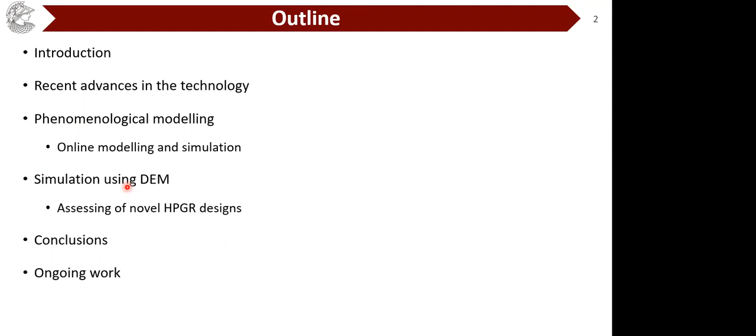Just briefly today, in the next 40 minutes or so, I'll talk about some of the recent advances in HPGR technology that have been keeping us excited. Then I'll move on to phenomenological modeling, an approach we have been really pursuing in the last 2 years. Then we'll talk about how we understand DEM as a fantastic tool to get depth on the HPGR, and move on to conclusions.

I think the group here is quite expert on comminution, but in case there's any newcomer, the HPGR has arguably been the most important advance in the field of comminution in the last 40 years or so. It was the result of the development by Professor Klaus Schonert in Germany. The beauty of the system is that he understood you can get fairly good efficiency if you press particles in beds under fairly high pressures. This was conceptualized in a machine with two counter-rotating rolls driven separately by motors, one of which is able to float over the frame.

The floating is the result of the pressurizing system made up of pistons connected to the hydropneumatic system with the nitrogen accumulator. The beauty of the system is that you pressurize the bed, but it's able to move, closing and opening, in response to changes in material compliance and the setup you prefer in your system as far as pressures and so on.

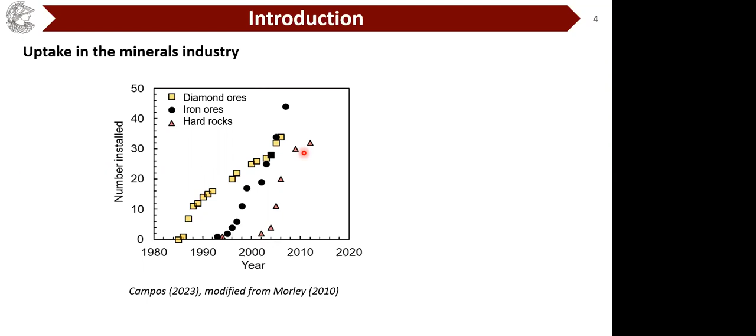Since then, this has increased, and I think people even lost count of the number of suppliers these days. There's no question that everyone involved in a new project for a hard rock application, iron ore, will definitely consider HPGR in a trade-off study for any greenfield project. So what made HPGR such a successful technology these days?

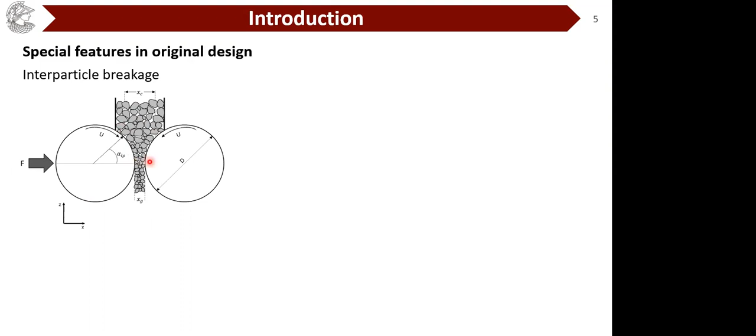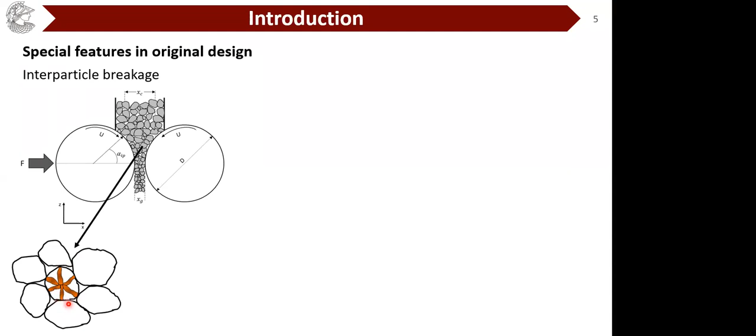I think there are some special features particular to this technology. One, as I mentioned before, is that interparticle breakage is what happens there. Only a relatively small fraction of the particles fed to the machine actually get in contact with the rollers. This is quite interesting because most particles are broken by other particles. Even though this is not as efficient as breaking particles one by one, it's definitely a much more viable option in terms of protecting the machine and its internal parts.

The other important aspect is the hydropneumatic system that allows the movable roller to move back and forth and control the pressure applied to the bed. It even responds like a spring that you can make stiffer or more compliant by selecting proper nitrogen pressures and oil pressure in the system. But of course, this introduces another level of complexity compared to a simple roll crusher.

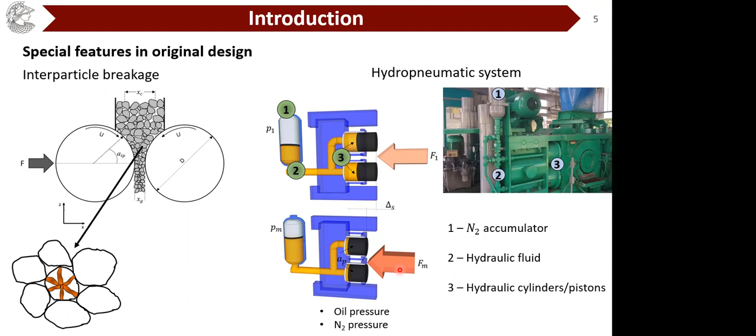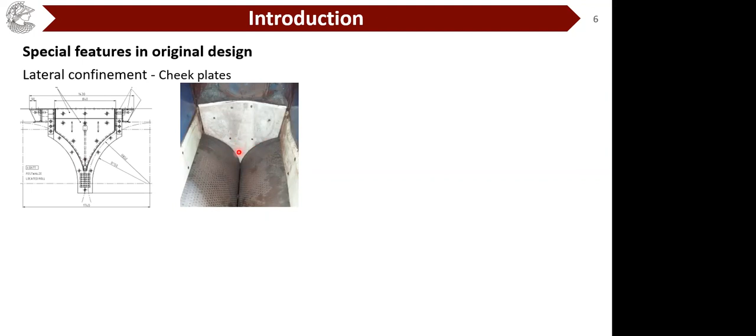Another aspect of the original design was that, since you had those pressurized rollers, you needed to contain the material from spilling out the sides. This was done with so-called cheek plates, which are consumable and eventually need to be replaced. They were introduced to prevent the sharp drop in pressure close to the edges. But even with those cheek plates, we realized that close to the edges of the rolls, there's very little size reduction. So relatively often, people recycle edge products back to the feed and separate them from the center product, which is definitely much finer.

Some pilot scale work we've done demonstrates this. Looking at the Blaine specific area for an iron ore pellet feed, the feed Blaine size is about 550 or so. Comparing that to what actually comes out of the machine, close to the center there's quite a lot of size reduction, but close to the edge, almost very little or almost none, depending on the conditions used.

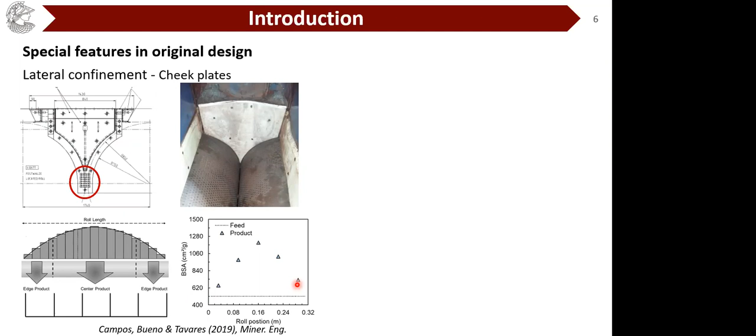So that's something that was within the technology and has its features. But as I mentioned, the Cyprus Sierrita experience raised that red flag, meaning that wear would have to be taken care of if the HPGR was going to be successful in the minerals industry.

The result was this very nice development, the proposed studded rolls, through which the tungsten carbide studs allow the material in between them to build up as an autogenous layer. This really prevents the roll itself from being worn too quickly, extending the life of the rolls quite fantastically these days. There are other options like the Hexadur, but not nearly as much used as the studded rolls.

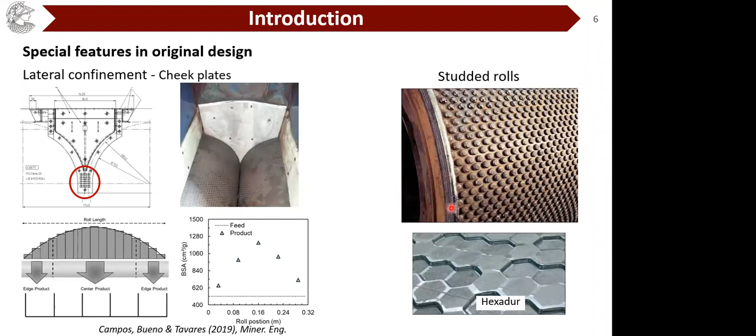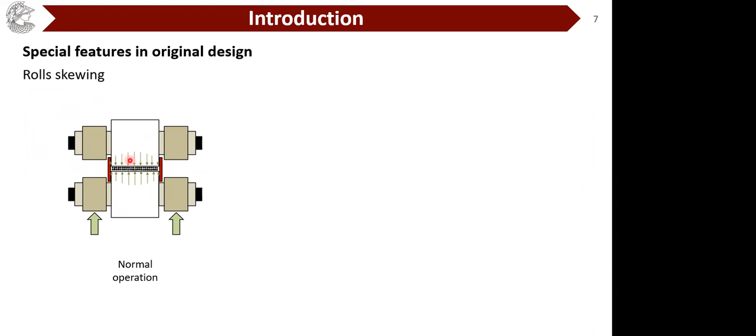Yet another feature of the technology, already built into the first design, was the allowance for the rolls to skew. So not only are the rolls able to move back and forth depending on the pressure you apply and the compliance of the bed, but they were also allowed to potentially move sideways.

If you don't have skewing and you have problems with feeding your machine—for instance, feeding coarse material to one side and fine to the other, or feeding much more material to one side and starving the other—if you didn't have skewing, you'd potentially have higher pressure on one side and lower on the other. In the long run, this would very likely result in uneven wear of the rollers, with much higher wear on one side and lower wear on the other.

Of course, the idea is that with segregation, you always have to take care of the problem at the root. But if you don't do that, and if your rollers don't skew, eventually you'll have uneven wear. The beauty of the technology is that skewing was considered from the start. So if there's an effect like this, the rolls are able to compensate for this uneven pressure by moving sideways, in such a way that the pressure will be slightly rectified.

So potentially it gives enough time to sort out feed problems without having to deal with severe uneven wear. These are all features that I guess were responsible, at least in good part, for the success of the machine in the early days of the technology, since the 1990s and so on.

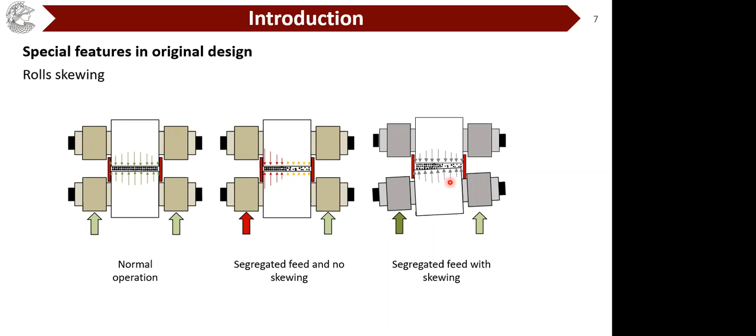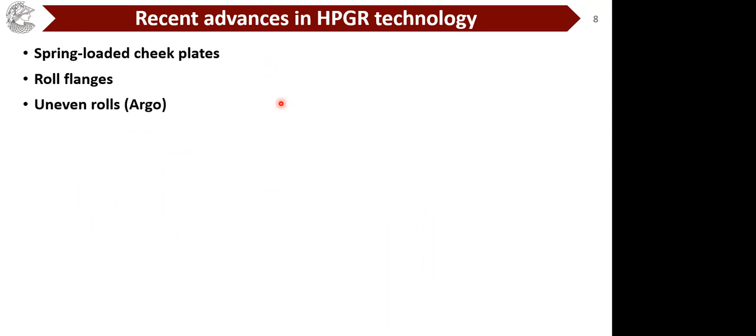Some interesting advances have been made since. I just want to mention three of them: the spring-loaded cheek plates, the roll flanges, and uneven rolls, which have been proposed in recent years as a new kit for HPGRs.

The spring-loaded cheek plates have been proposed by KHD, today known as Weir. The idea here is essentially to treat the cheek plates as things that can be managed—not only do they wear as time goes by, but they also close as needed to compensate for this wear, and to comply better with situations under more extreme skewing conditions, such as the one illustrated here.

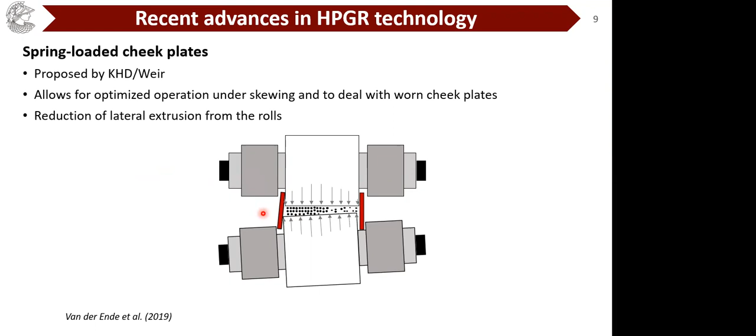By being able to manage the cheek plates, you can potentially reduce lateral extrusion, because if you have very moist and fine feeds—such as the ones we deal with in iron ore pellet feed, as high as 8% moisture—if you don't have closed cheek plates, a significant proportion of material can bypass from the side of the rolls without being reduced at all. This is an interesting recent development that can really improve the performance of HPGRs.

Another development, proposed by Metso quite a few years ago now, are the roll flanges. Essentially, one roll has flanges on both edges, so it works like a moving cheek plate system, allowing these lateral areas to be more confined than you get with a traditional cheek plate.

The idea in this system is to potentially reduce the edge effect, and also by reducing the friction between the cheek plate and the bed, you'll be able to move more material through the rolls, which is essentially increased throughput. These are the claims, and some of the results already show that.

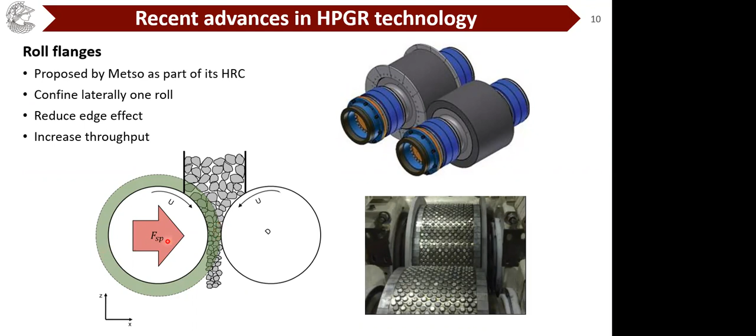Just one last advance I'd like to mention is a fairly different design of HPGR that has been proposed, called the Argo mill. This is shown here from one company in Germany, Argo IPS. Essentially, the two rolls are at an angle, 30 degrees here. The difference is also that they propose to only motorize one of the rolls; the other one responds to the motion of the bed and the other roll.

As you can see here, this machine could potentially work without being choked, so really just with a small bed of material here. Besides, another claim is that it would potentially allow working with much higher velocities.

Looking at the y-axis, throughput, and the x-axis, velocity: we know from experience that as we increase velocity beyond a certain level, you start to get slip in most HPGR designs. It's actually claimed that Argo can prevent this from happening using this system.

So these are some of the things that have been out there. Some of them have already been adopted by industry, some others not. But it really shows that the scene in HPGR technology has been quite alive, and it shows that the technology will continue to have a place in the future.

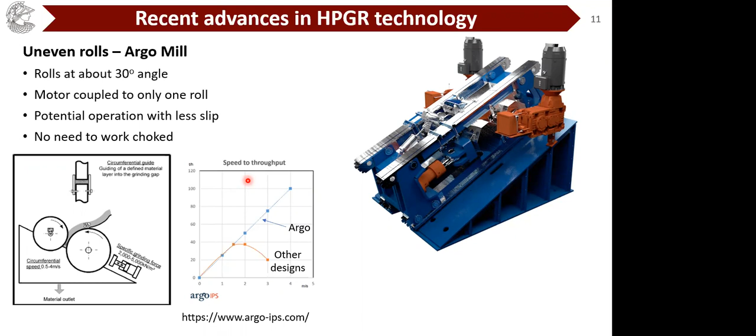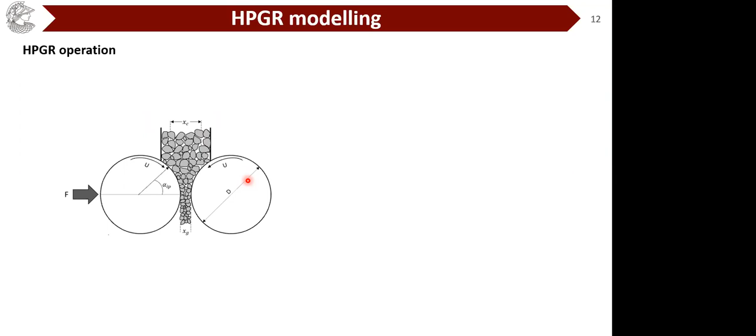But of course, as people who want to understand and improve both the operation and design of HPGRs, we'd definitely like to understand how we can put the performance of the machine inside a computer, to be able to respond to what-if scenarios. So I'd like to understand how the HPGR operates.

By looking again at the machine and breaking it into different contributions, such as material characteristics on the upper side, the machine operating conditions that we can play with during operation directly or indirectly, and of course the design characteristics of the machine, all dimensions and characteristics of the hydropneumatic system. With all these things, we'd like to be able to predict with fairly good confidence what will happen in the machine.

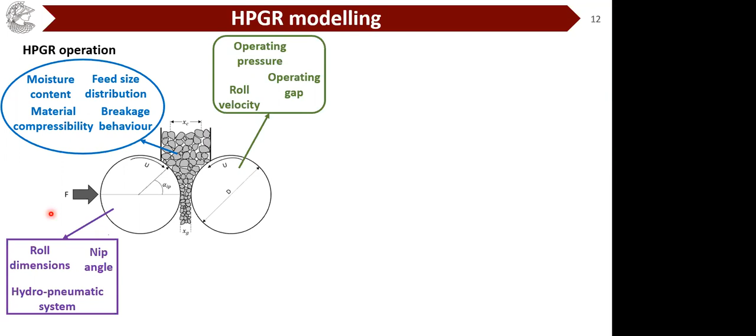So, of course, when we look at the real world, we'd like to, as I mentioned a few slides ago, look at things that do happen in real life, such as the rolls wearing during operation. So we want to be able to predict not only what happens when the rolls are entirely new, but also as they are progressively worn.

We want to be able to understand the confinement system, the different confinement systems, and how they will respond in a particular operation. We'd also like to describe the effect of skewing in the event it may appear. So there are definitely different levels of complexity we'd like to tackle in our modeling approach. So how can we do that?

Definitely, there's plenty of complexity in what I just mentioned. So the approach we use is essentially to understand how particles break, and we can do this very nicely starting from individual particles, as you can see here, using a microcompression testing system that allows us to characterize the distribution of strengths of very fine particles, 100 microns, 50 microns or so.

But we can also go to piston-die systems to get insights on how the material will respond, to be able to take that information into the HPGR. In the end, we want to be able to use whatever tools are out there to predict what happens in the HPGR.

So we looked at phenomenological models, population balance type models, to provide results such as throughput, particle size distribution of the product, and power. But we also recognize there are obvious limitations to population balance systems, because they really lack quite a bit of understanding of the physics behind the machine.

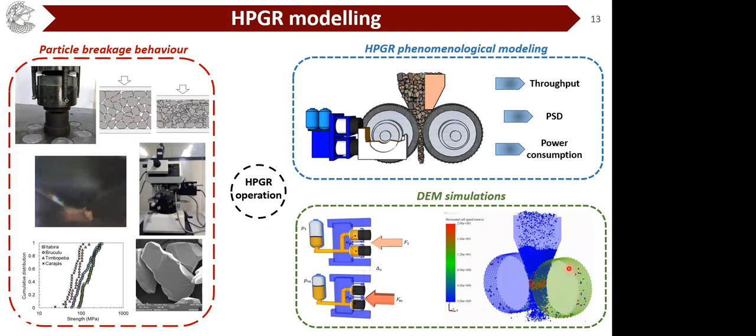So we look at DEM as a potential tool to incorporate quite a few complex things, such as details of the hydraulic system, skewing effects, roll wear effects, and so on. So in order to do that, we coupled with Vale here in Brazil, who was really keen on improving their HPGRs.

You can see here that HPGRs sit right in the middle of the whole process for preparing and producing iron ore pellets. They're downstream from traditional ball milling and classification steps, and upstream from the pelletizing operation. So they're basically the last resort to add value to the material before it becomes a commercial product, which is iron ore pellets.

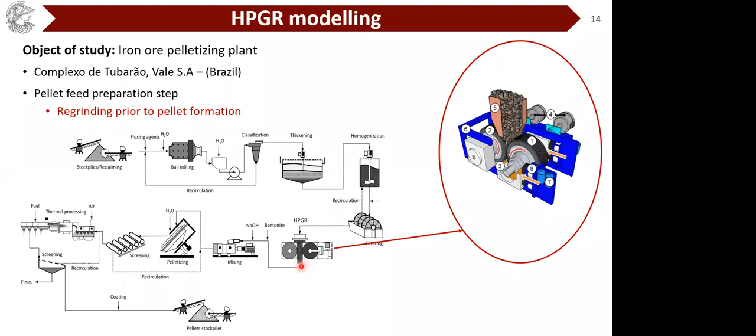The HPGRs have a role there, and they've been used quite successfully, a number of units around the world, and at Vale since the 90s. But when we started to talk to them, we realized that the level of understanding of the machine's performance was relatively limited for this application, which is definitely not the application we see these days, and not the original application that brought HPGR to industry.

Three successful approaches that essentially incorporated most of these variables you can see here: material variables, machine settings, and calculated or assumed key variables such as gap and operating pressure, giving some of these outputs. Some models did provide some of them, others not all.

What we did, because of our experiences—as Malcolm mentioned, I did my PhD in Utah, and a lot of the work from John Herbst and the energy-specific selection function was done there—we could really see the potential of this Torres and Casali model to give a good contribution to the application we're interested in, which is iron ore pellet feed.

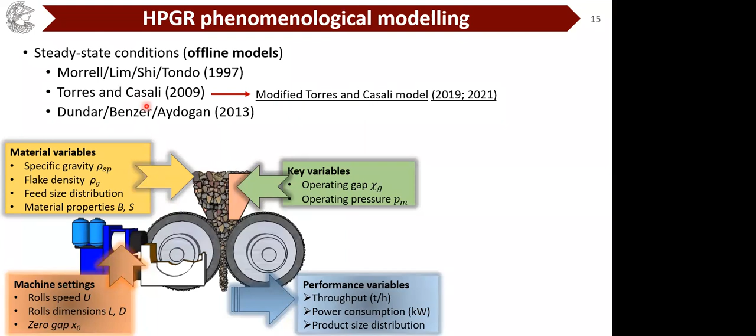So we really invested quite a bit of effort in improving our understanding of this model and how it can be applied successfully to HPGRs grinding pellet feed.

So just an overall look at the model: essentially, a population balance model is used, and a parabolic power profile is assumed. On the basis of the machine settings, the material variables, and some key variables such as gap, the model assumes plug flow to predict throughput, and a simple power equation on the basis of compressive force and nip angle to predict power. With power and throughput, we could calculate the particle size distribution.

This is the original Torres and Casali model proposed quite a few years back. It's documented in quite a few publications. On the basis of extensive data from pilot scale and industrial scale, we understood that in order to apply this model successfully, we needed to modify it. So we called it the modified Torres and Casali model, understanding that the nip angle is really a parameter that has to be fitted on the basis of good data.

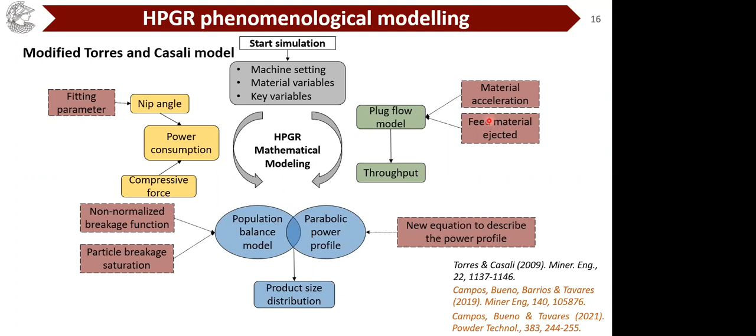We understood that the breakage of these materials was fairly unusual, so we updated the breakage function. We incorporated the effect of saturation. We also understood that depending on the design of the HPGR, the parabolic power profile doesn't appear, but rather a trapezoidal one. So all those things, including material acceleration and material ejected from the edge of the rolls, were introduced to help the model describe reality.

Essentially, when we naively applied the Torres-Casali model to data from pilot scale and industrial mills—these are industrial HPGRs—we could see quite a big difference between the experimental results and the model predictions.

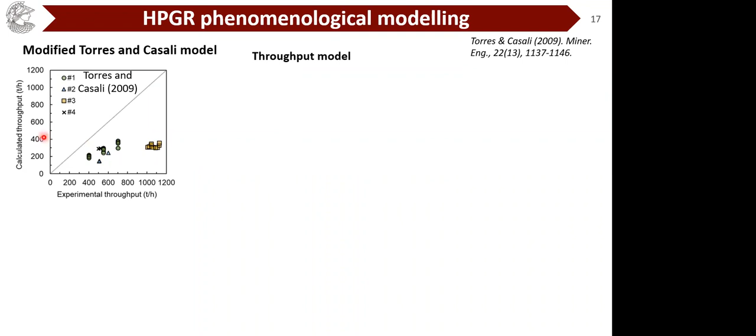What we did then was incorporate those effects I just mentioned: the effect of edge material being ejected from the edge of the rolls, as illustrated here, which we see in practice quite significantly in HPGRs with iron ore pellet feed, along with effects of acceleration and so on.

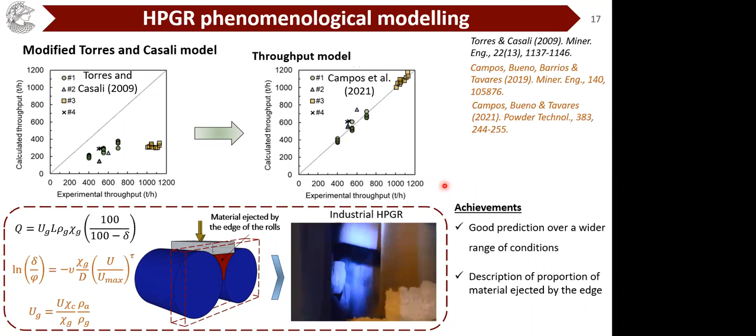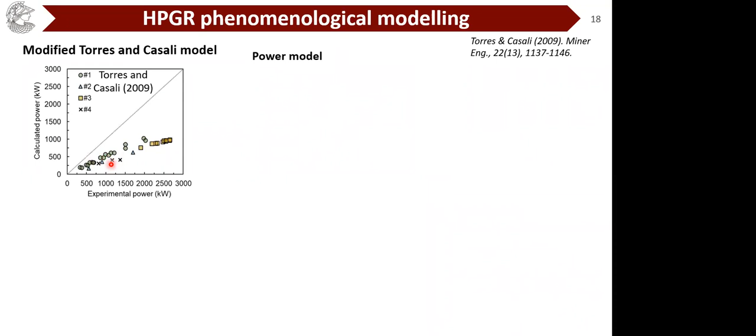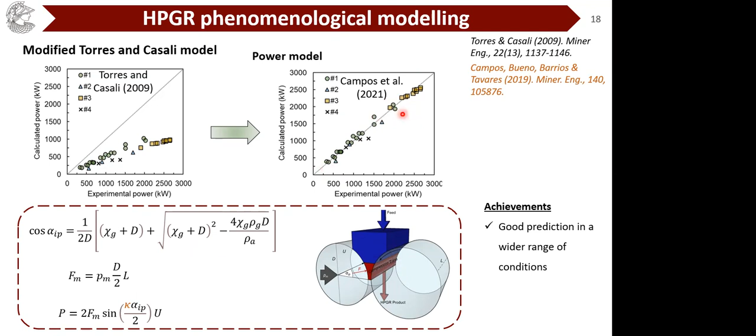So the experimental and calculated results were quite different, but nevertheless, with a bias that could be corrected, essentially by introducing a parameter that adjusts the nip angle from the calculated one. Just by doing this tweak, we could actually get very good prediction of power for a range of machines, from industrial pilot to industrial scale.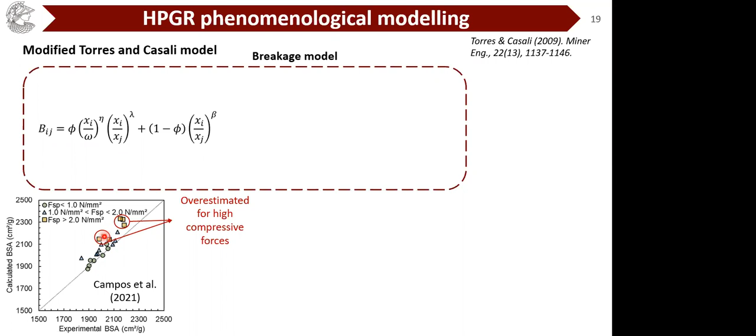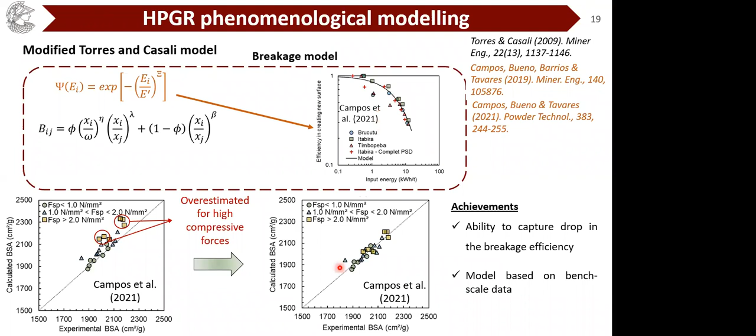But we could see that for very high pressures, we were overestimating the fineness of the product, which suggested we weren't accounting for something important. On the basis of piston and die data collected from the lab, we could see there is an inefficiency that appears as you increase the specific energy or pressure. By introducing this correction for inefficiency due to overloading energies, we got much better agreement between the predicted and measured specific surface area.

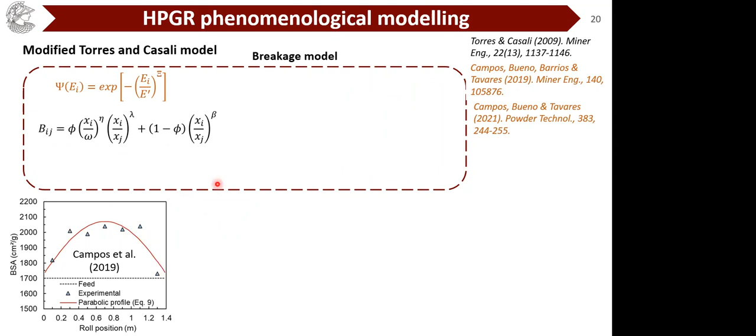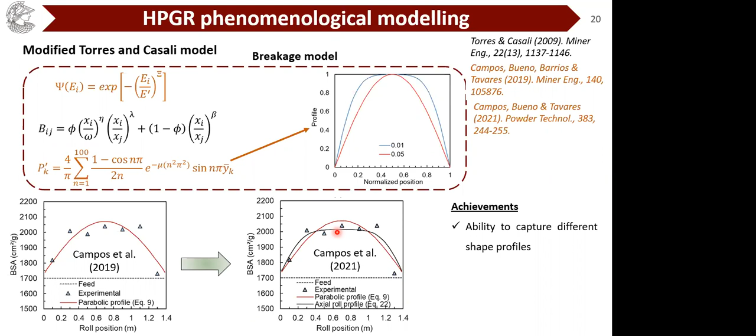In addition, the original model by Torres and Casali assumed a parabolic power profile. But when we look at industrial machines, we see very often a more trapezoidal power profile. So we incorporated a different model which allows us, with just a single parameter, to describe this power profile, which translates into a fineness in the product profile, shown here in the black line. We were able to successfully describe that both from pilot and industrial scale machines.

We've been using this model in the minerals industry quite a lot offline, to improve the process and so on. But we'd like to use this model now to make decisions online and to assist operation.

This requires another view of the model, looking at real-time information on the process. If you want to predict operation in an HPGR, that will have to somehow be understood. In the case of iron ore pellet, you have to account for the fact that you're blending materials in the feed with time, and that blend changes. So potentially we can use this type of information with the model we developed. It's essentially a quasi-dynamic model, because we're not looking at very short dynamics like within seconds, but really at dynamics within minutes and hours.

The vision we have is to use the model as a digital assistant, something that can assist the operator to understand what lies ahead in the next few hours of operation, to better fine-tune the operation instead of just responding to whatever happens, like in typical control systems today. Potentially this approach can also be used as a control strategy in the future to improve operation of the machine.

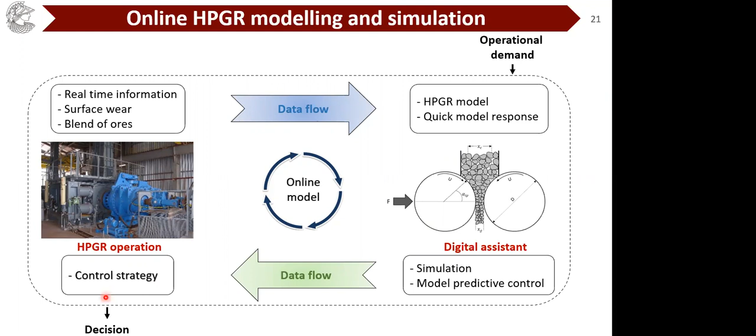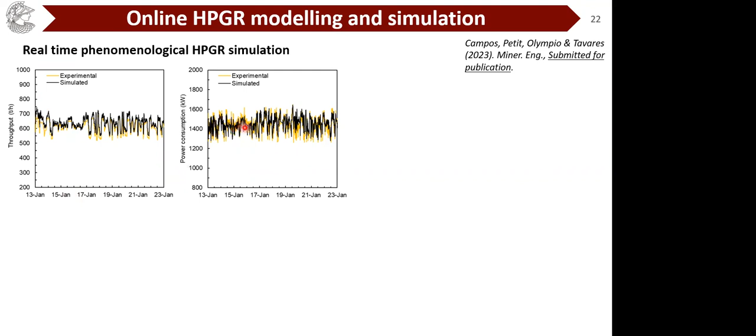So how did we go about testing this model using real plant data? Looking at very short time spans, you can see the yellow lines here, which are essentially the data from the plant, from the supervisory system. On the basis of data we have from the feed and the settings used, we could essentially predict the throughput fairly well in a very short time span, and also predict the power, leading to fairly good predictions of the specific energy.

And this, we understood, was the reason why the model was already completely failing in predicting the operating condition, the outcomes of the process. So what we did is actually put together...

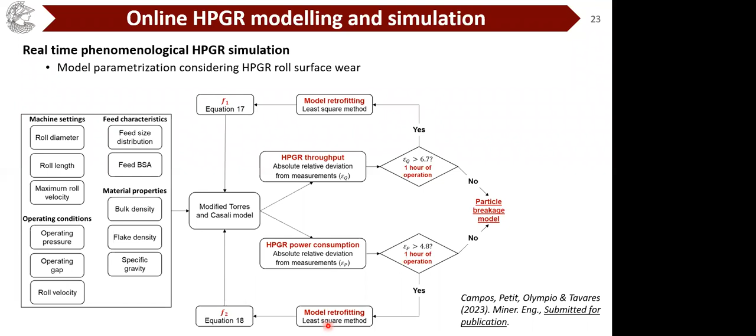This now allows us to fine-tune a couple of model parameters, very few model parameters that we call F1 and F2, to be able to account for just a tweak in the throughput and a tweak in the power, to be able to predict the results from operation. So just by doing this, we could actually reduce quite dramatically the deviations from the model to what we see in practice as far as throughput and power.

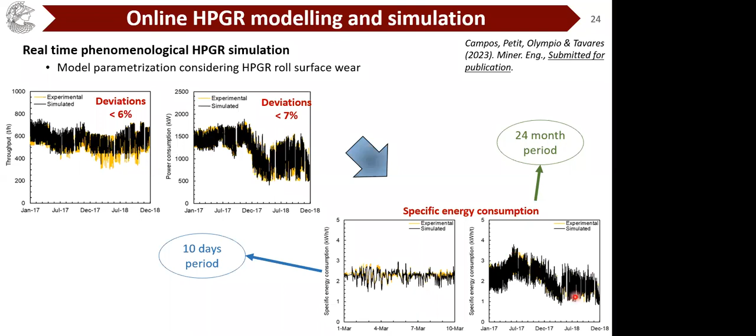And of course, the result by doing this, we could see very good prediction here in specific energy for a short term that we're already doing a good job, but especially for a very long term, maybe over a year, so over two years in operation.

So we're definitely very happy to be able to do that offline, but using data online. And just to illustrate, we want to be able to use this information to let them know what they could have done differently in the operation.

So for instance, when we look at the feed to the HPGR, the Blaine, which represents fines, varies quite a lot. And what we have seen in practice is that the product of the HPGR is almost responding to these changes in the feed. So it means that very little is done these days to tweak the HPGR to actually try to get what we would like, which is essentially a constant Blaine for the pelletizing operation.

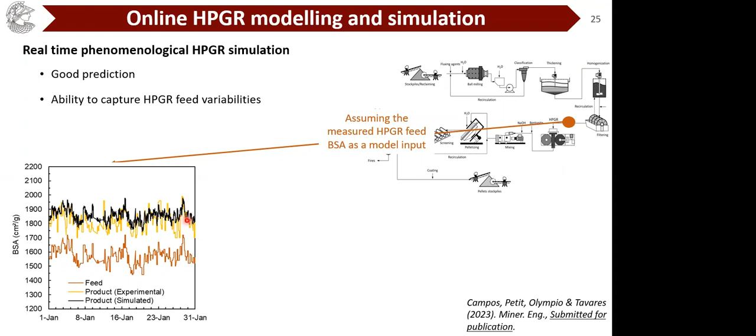So essentially, first what we did is just apply the model and say what would be the prediction of the Blaine. It's fairly good. It's not really as close, very close to the product, but gets very nice the trends. So we qualified, I believe, to be able to propose to them what they could have done differently in the operation.

So in order to demonstrate that, we'd like to show what could we do if we actually use the model to optimize these operations. So these are the same data as before.

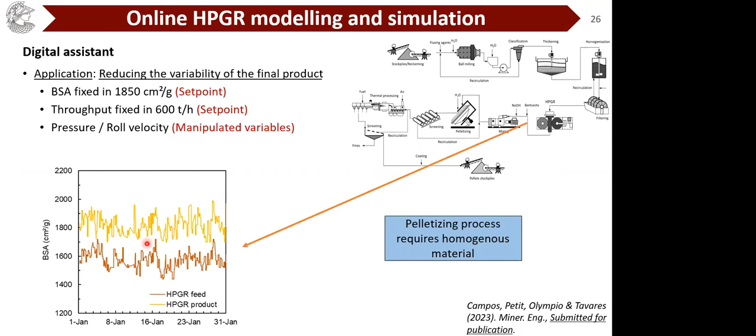So by doing this, we could essentially say that if we tweak the velocity and the pressure using the understanding from the model, we potentially could get this level of constancy in the Blaine of the product, which is far dramatically less than what we see in practice. As you can see here, deviation is 13.6 compared to 66 centimeters square per gram.

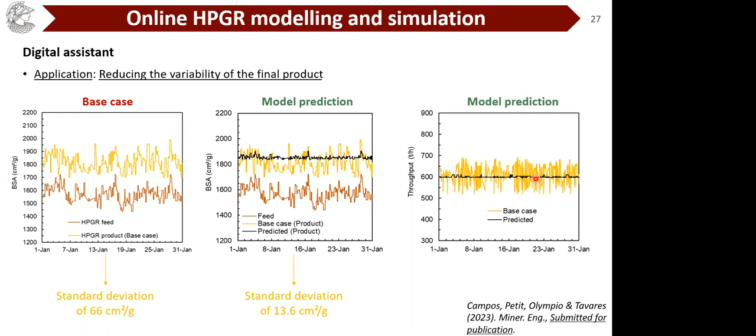And throughput, of course, we could actually drive throughput to a very constant value of 600 tons an hour, which is exactly what they need in the pelletizing operation.

But of course, this is important to see that in practice, this would require much more significant changes in things such as pressure and velocity. And what we see in practice is that the operation ends up being very conservative, keeping the pressure and the velocities almost constant, even though there's quite a few things changing, such as the feed characteristics and the ore characteristics.

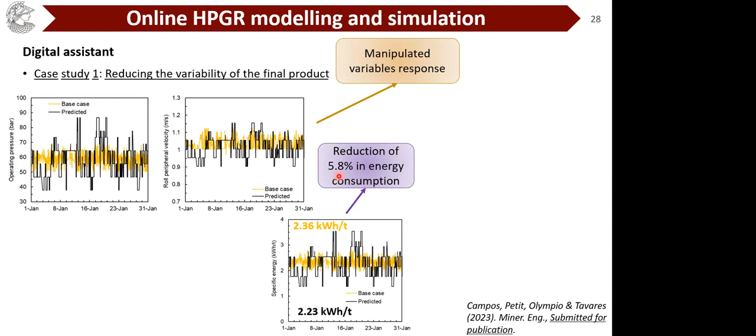So we believe that the model will be able to allow people to definitely look outside the box of operating conditions, because all of these changes here in black predicted are well within the conditions that can be dealt with in the machine. So by using this, we could demonstrate that they could reduce as much as 5.8% in specific energy and get a much more constant product if they actually have these tools online.

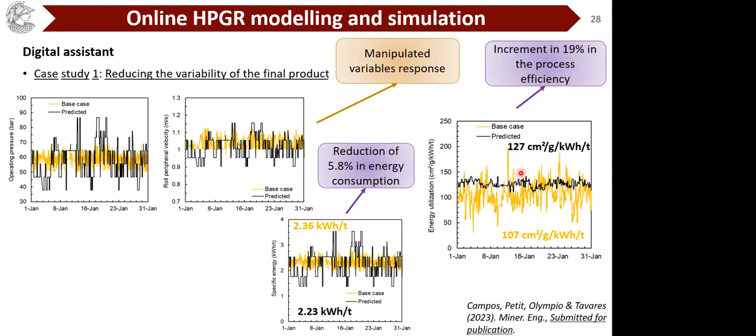And on top of that, if you look at this specific energy utilization, which is essentially specific area per kilowatt hour per ton, we could demonstrate that by operating optimally the HPGR, we could actually increase the efficiency by as much as 19%. So I think we're happy that we could demonstrate this application of the phenomenological model.

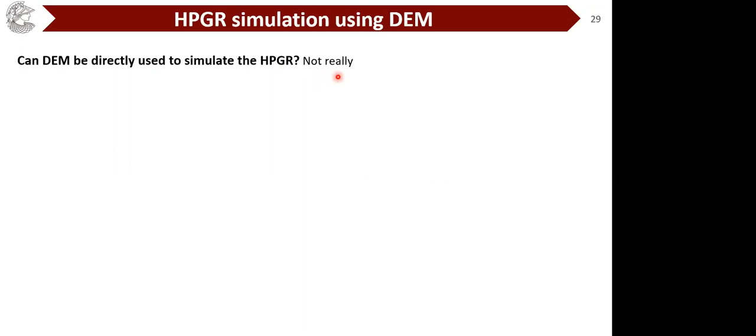So this really motivated us to look at DEM as a very powerful tool to simulate the HPGR. But I think the answer to the question, can we use DEM right away to simulate the HPGR? I think the answer is not really. DEM alone cannot really describe what happens in the HPGR. The reasons are at least three. The first is the fact that you really have to describe the multi-body dynamics.

So you have to describe the fact that one of the rolls is moving, responding to the compliance of the bed. We have actually been able, together with guys from DEM Solutions back then, Altair EDEM, to incorporate this model into EDEM since then, and it's already standard today. Very recently, we have even been able to not only put the motion in the X direction, but also the twist in the XY direction to be able to get this skewing described.

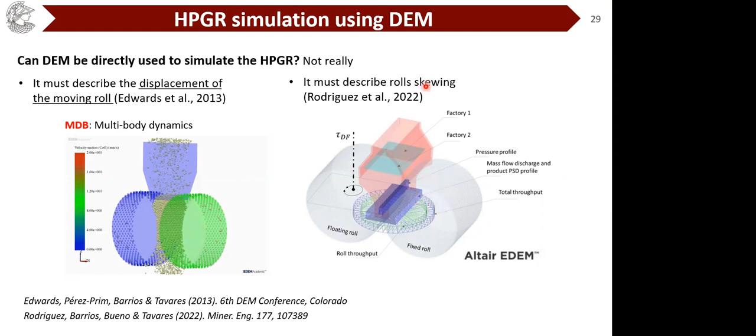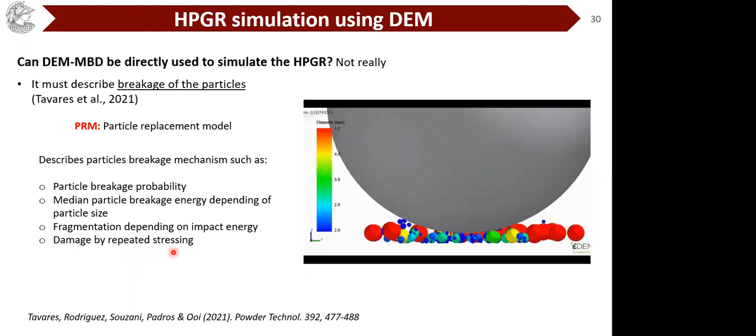The other piece of the puzzle required to describe HPGR operation in DEM is to be able to actually break the particles inside the environment. This was done using a particle replacement model that we implemented in the code a few years back. This breakage is fairly detailed because it accounts for the distribution of particle strengths or breakage probability, variation of particle strength with size, energy-dependent fragment distribution, and the damage that results from repeated stressing. Even though this model was originally developed for impact, we have been using it for compressive systems fairly successfully, with just some challenges that I'll talk about shortly.

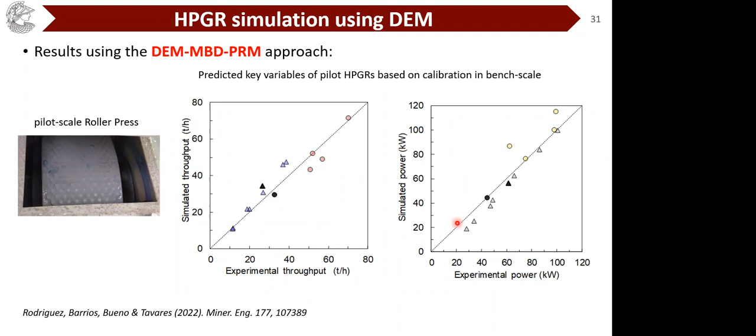So how did we go about using this model? We first did quite a bit of validation work on the basis of piston-die testing, material calibration for DEM contact parameters, and using extensive data for pilot scale machines. You can see here throughputs in the tens of tons an hour. With just a little bit of fine-tuning in the DEM, we could predict, on the basis of just one test, results from a number of different conditions - velocities, pressures - and this applies to throughput and power. We can actually get those two from the DEM simulation fairly successfully already with just one base case.

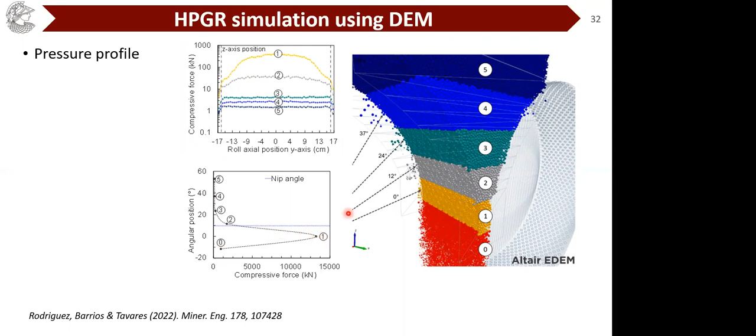Of course, the beauty of DEM is that you can really go inside the machine and understand some of the details. For instance, you can look at the pressure force distributions just right at the gap, or almost at the gap, and see that as you move upwards, the force is reduced quite dramatically, but you may also get some breakage. It allows us to exactly see the nipping when it happens in the HPGR, compared to what you see from the equations. So one of the things we can do in DEM is answer the question: what happens when the rolls are worn or partially worn?

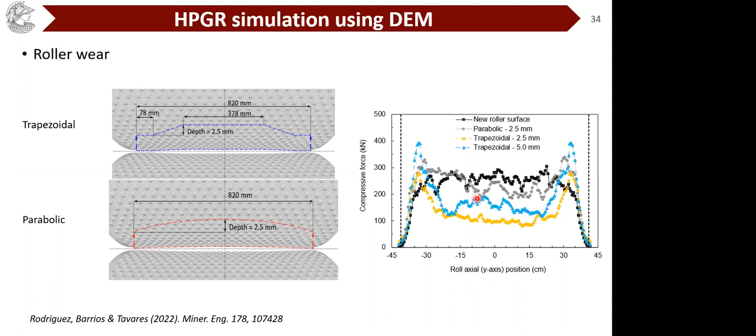Another thing we could study using simulation is the effect of segregation in the feed. For instance, if one part of the machine is fed very strongly with material and the other is underfed, or one side is fed with coarse material and the other with fines, or one side with very tough material and the other with very soft material - what happens to the degree of skewing? Skewing, as you know, is measured in millimeters per meter of the rolls. Here is the relative variation across throughput, size, and strength. You can nicely see that if there's no variation, there's almost no skew.

Here is just an amount of 0.5 millimeters skew. But as you get more and more variation, especially if you have segregated feed, coarse material on one side and fine on the other, very little segregation in respect to size leads to very significant skewing, 4 millimeters, almost 5 millimeters per meter. So it's a little more compliant here.

If you really have strength variability, it doesn't really skew as much. So these are some things that we can really look at in simulation and of course look back at operation and check if it makes sense.

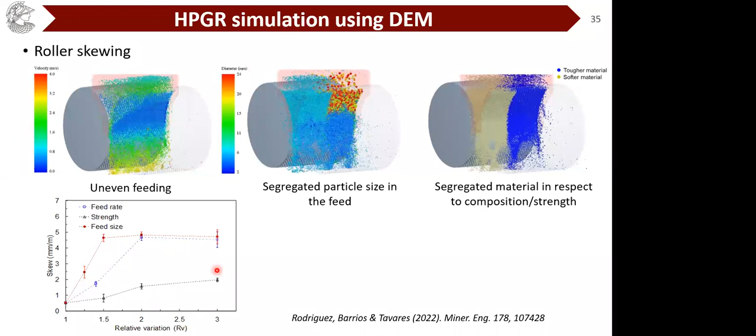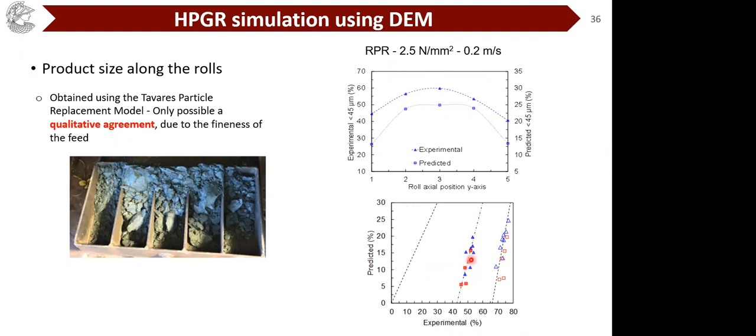So you can see here that definitely when we look at the 80% passing material, or the passing 45 microns for instance, it is quite off from what we measure experimentally, but nevertheless quite consistent with the predictions, at least qualitatively.

So just very quickly in the last few slides, since I talked a little bit about some of the advances that have been happening in HPGR technology, I think it's interesting to see what happens if you actually implement some of those changes in your existing HPGR. That's typically fairly expensive to answer if you want to do in real life, but I think this is perfect to be done in DEM, because for instance we can see what happens if you put spring-loaded cheek plates in an HPGR that just has regular cheek plates.

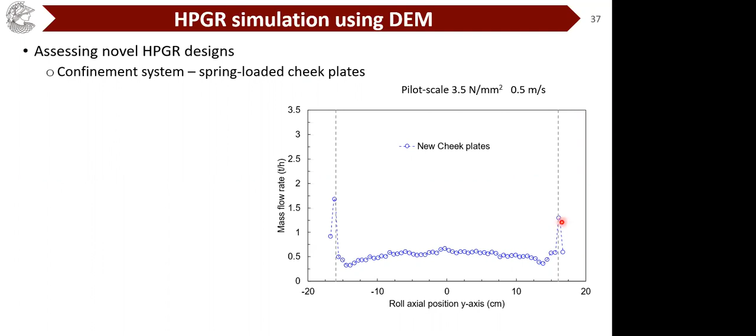So if you have regular cheek plates, what you see is something like this in an HPGR. We have material flowing, the mass flow material in the middle fairly constant, but then it really raises close to the edges when the cheek plates are new, nicely closed, for a standard operating condition here.

But then what happens is that due to wear, you start having more and more allowance of material to spill from the sides of the HPGR. So the flow from the middle even drops a little bit because some material will be spilling out from the edges, and obviously that material will be pressed very little. That's something you don't want in an HPGR, but it happens in practice because the cheek plates are being worn.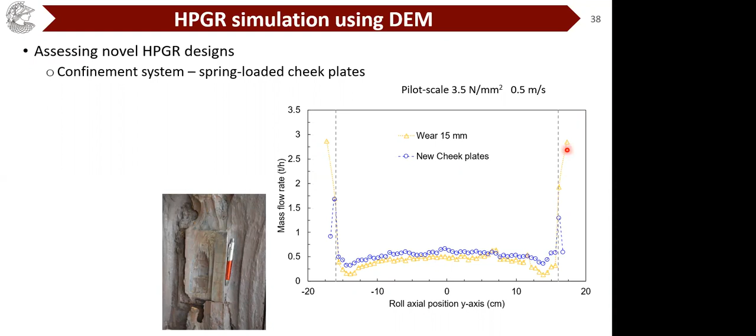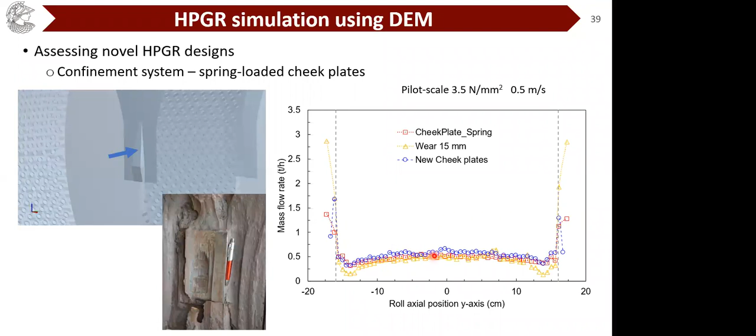What happens is that now we could simulate the effect of doing exactly what the spring-loaded cheek plates does, which is apply a force to make sure the cheek plates keep closing even though they are getting worn, as you can see here. By doing this, you can see in red that you fairly compensate the wear by actually pressing the cheek plates, so the mass flow can be really reduced.

When you look at the details, for instance what happens when the HPGR was new compared to what happens when the spring system is applied, you can actually compensate quite a lot, because we reduce the bypass that increased because of wear and basically retain essentially the throughput as before.

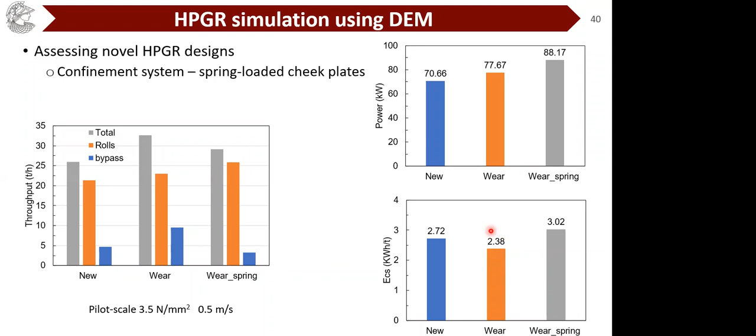With worn rolls, of course, you have much throughput, but you don't have much size reduction. You can even see here that depending on the conditions, you can even increase power if you push the spring even further, and the specific energy can be managed pretty much to the level that you want, whereas in practice it will reduce if you don't do anything and just allow the rolls to wear.

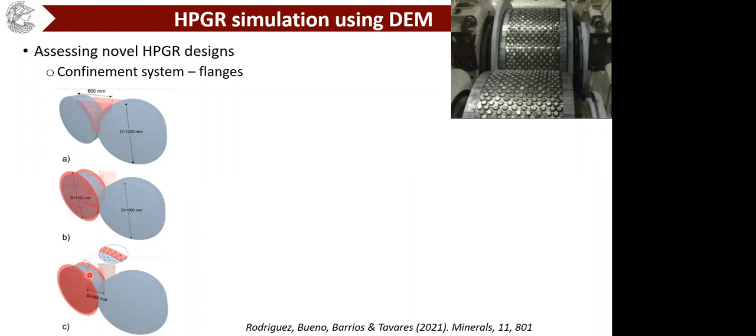Other application that is feasible to study here is the flanges. So we know that if you have an HPGR with cheek plates like this, we can actually put flanges. Those flanges can be smooth flanges or pin flanges, as you can see in the picture. We'd like to essentially see what happens if you actually put flanges to an existing machine.

So this is the original design, the throughput, the mass flow rate, as shown before, with some material spilling from the sides because of the distance from the cheek plates.

What happens is that if you put smooth flanges, the distance difference was very modest, meaning that depending on the configuration of the flanges, if there's no grip that can really be exercised by them, you may not see much benefit.

On the other hand, by putting studded flanges, you can see it definitely reduces variation in the flow rate from the edges, reducing material spilling from the sides.

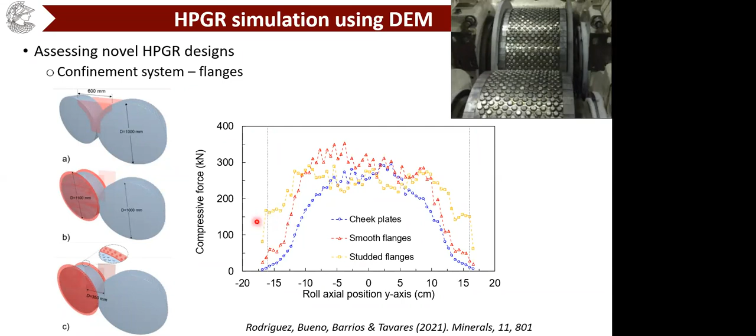It definitely seems like a good thing to have in the HPGR, which indeed it is, because the blue line, the force distribution, shows more like a parabolic profile with cheek plates, whereas the studded flanges manage to get the forces more or less averaged across the whole roll. There's still an edge effect, but it's much more reduced.

Looking at numbers from the cheek plate simulation, we get results like 30 tons an hour with a specific energy of 2 kilowatt-hours per ton. When you put studded flanges, it changes the gap quite a bit under the same operating conditions, increasing throughput and power, but on the other hand it reduced the specific energy a little.

So it's important to keep in mind that if you put flanges, you probably increase throughput, but you need to check if you have enough power to cope with that. Otherwise, you'll probably have to work with lower velocities to keep the same product size reduction.

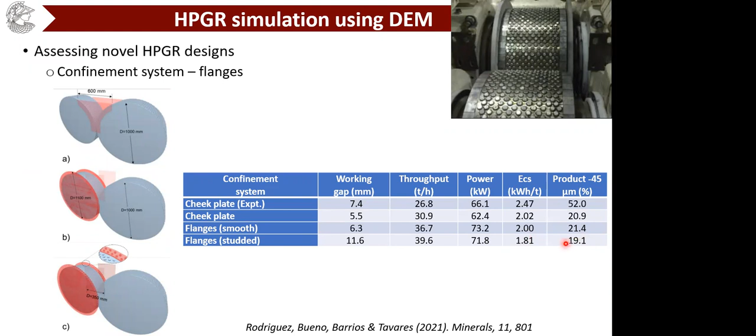From the experimental data to the simulation, there's obviously a big difference because we couldn't put enough fine particles, but nevertheless we believe these trends in the simulations are reasonable: when you put studded flanges, you don't change conditions much, but you reduce the specific energy, so the product gets slightly coarser, even though more uniform.

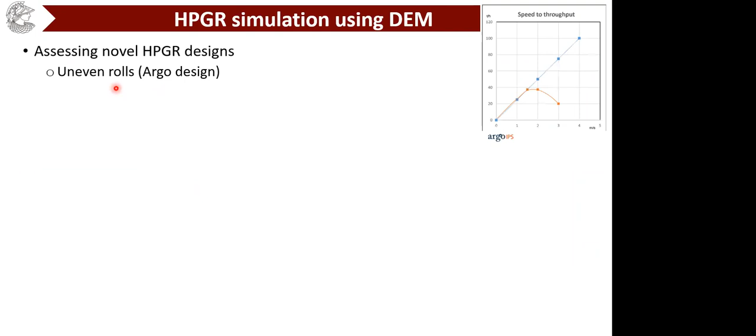The very last thing I'd like to talk about is the Argo design, which I call uneven rolls, essentially rolls that are really at an angle. We did exactly that simulation for that system, remembering that it's not a choke-fed crusher roll HPGR anymore. We simulated it for these exact conditions.

One of the highlights for this technology is the potential to work at higher velocities without really slipping. Using exactly the same data as before for the other HPGR, we couldn't really see this effect at fairly high velocities, around 2 meters per second.

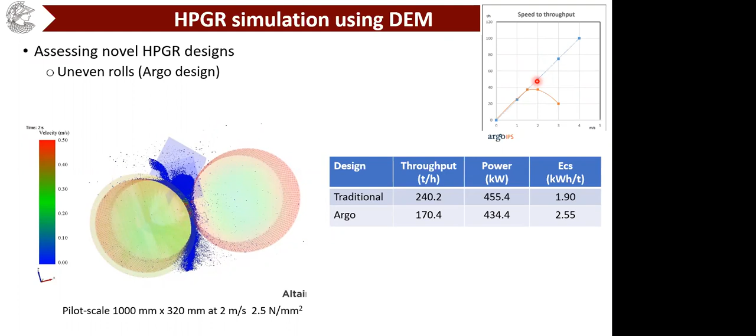So the throughput compared to the traditional design was lower, and the power was actually lower too, so the specific energy was higher, but it definitely didn't show the trend we observed before. It's something worth looking into in more detail, because in the first test we couldn't really verify it.

In fact, since one of the rollers is actually driven and the other one is responding, there ends up being quite a bit of slip in one compared to the other that is driving. On top of that, the force distribution along the rolls is quite different from what you get in the normal HPGR: the driven one lowers the forces, and the other one ends up having more slip.

As a final point, we've been working on hybrid modeling approaches, using the modified Torres and Casali model in conjunction with DEM, because DEM is quite powerful to look outside the box I just showed you and predict power and throughput, but it's not yet easy to predict with fidelity the product size distribution.

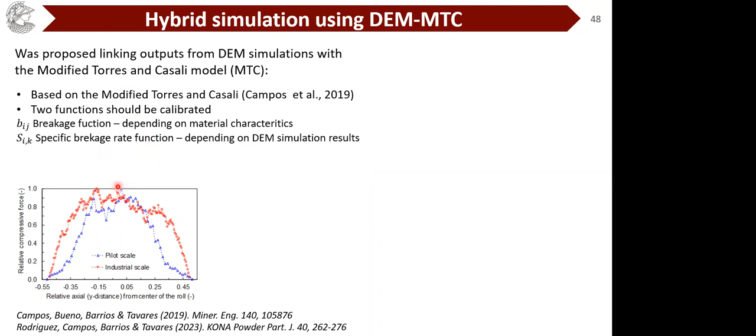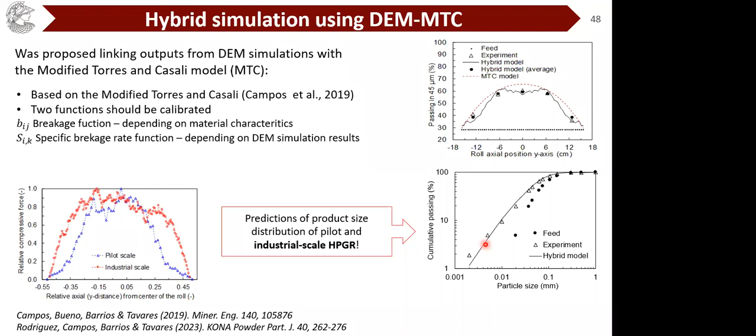This leads us to the conclusions regarding the HPGR phenomenological model: I think it has the ability to describe four industrial HPGRs operating under controlled conditions, under steady state conditions.

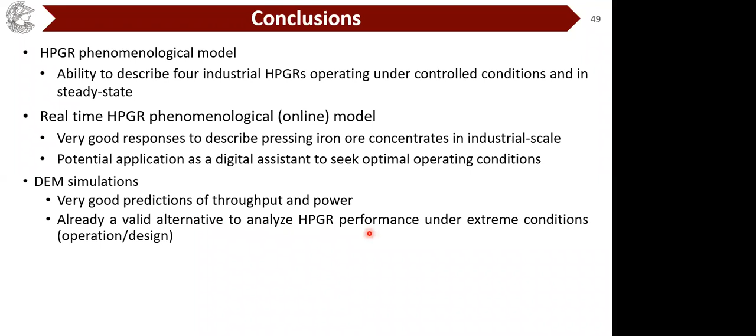The real-time HPGR model has demonstrated very good responses for pressing iron ore concentrates at industrial scale, with potential application as a digital assistant to seek optimal operating conditions. Whereas DEM simulations gave good predictions of throughput and power, and I think it's already a valid alternative to analyze HPGR performance under extreme conditions, operation and design. But of course we're quite busy.

Regarding the phenomenological model, we're working on improving the description of the saturation effect. We're looking at multi-component feeds and how the HPGR responds to that. Good work was done by our colleagues from Turkey on this topic.

In the online model, we're improving the description of the HPGR dealing with worn rolls, and we've also been implementing it in an industrial plant as a digital assistant. We're already looking ahead at its potential use in advanced control.

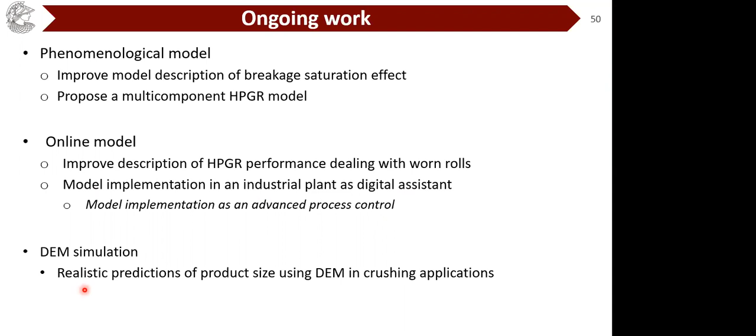With DEM, we're looking specifically at crushing applications, those where we can put coarse particles exactly as they live in the real world, to be able to predict them.

Thank you all for being present, and I'd like to be available to answer any questions you might have. Thanks.

Back to you, Malcolm. Just wrestling with the, yeah.

Okay, well done, Marcelo. Quite a far-reaching seminar as usual. People might not appreciate how much material is covered in that, the years of work, and how much at the cutting edge of rock breakage that work is. Really a good example of bringing science, engineering, computational tools and practical knowledge and application together, and not easy to do.

So thanks, Marcelo. So, Grant, of course, has an instant question. Shoot. Hi, thanks Marcelo, really interesting question, really interesting presentation.

I'm interested in the flange versus cheek plate design of the rolls. You talked about the fact that it reduces the variance in pressure, increasing the pressure on the edges, but also increases the operating gap. I was wondering if you could describe which of those in your models was actually responsible for the increase in throughput, because it looked like the operating gap doubled, but the throughput didn't quite double. So I was just interested in what is actually creating that increase in throughput.